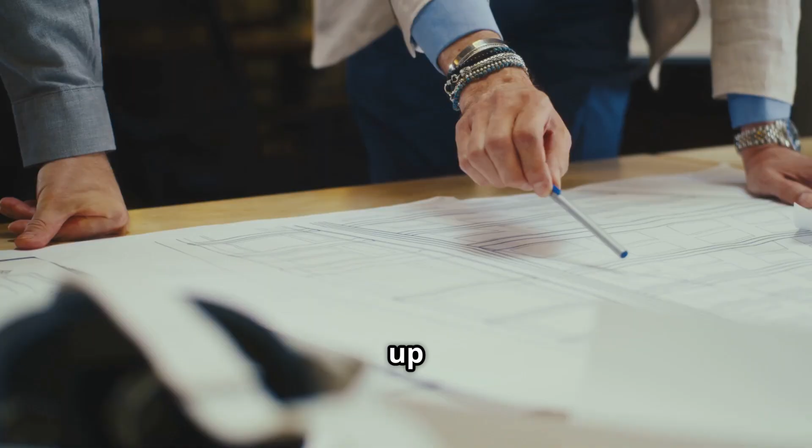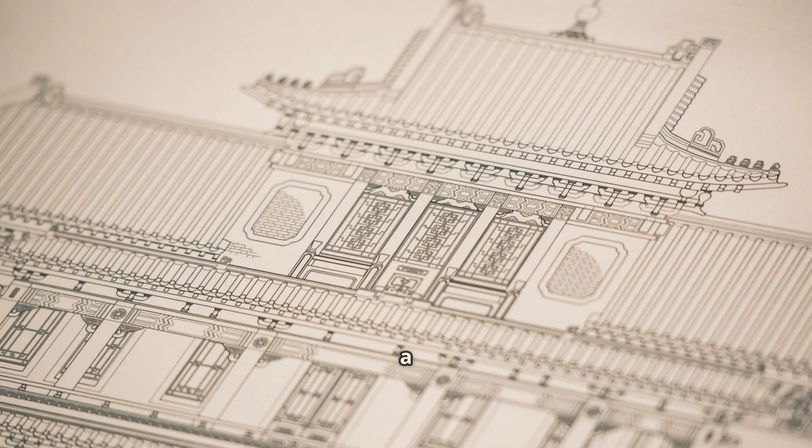The first sketch was drawn in May 1884 by Maurice Koechlin and Émile Nouguier. Their initial drawing was a raw, skeletal concept, a feat of pure mathematics and structural logic. It was their calculations that proved such a tower could stand against the forces of wind and its own immense weight. Eiffel initially called the design a giant pylon and showed no interest.

Koechlin and Nouguier then went to the company's head of architecture, Stephen Sauvestre. He looked at the design and realized that for this tower to be accepted, it needed more than just strength. It needed grace. On the original design, Sauvestre added the decorative arches at the base and the glass pavilion to make it look less like a bridge and more like a monument. He also designed the pavilions on the first level and the dome top.

Sauvestre transformed a stark engineering diagram into an architectural statement, giving the iron skeleton a sense of elegance and form that softened its industrial might. This is the hidden story of the tower's creation. Eiffel looked over the design again and decided to buy the patent rights from his own employees to become the sole owner of the design. His name was now attached to the project, and it would be his name etched into history.

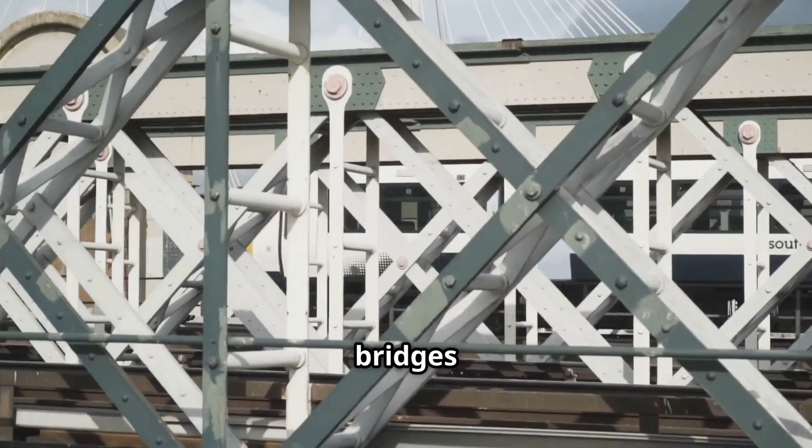Now the question is, who was Gustave Eiffel? He was a bold entrepreneur who took on the monumental risk and staked his reputation on its success. He was a brilliant engineer, a master of metallic structures known for building bridges that spanned impossible distances. But building the Eiffel Tower was no small feat. It is a story of collaboration, silent geniuses, forgotten builders who would later risk their lives to assemble it.

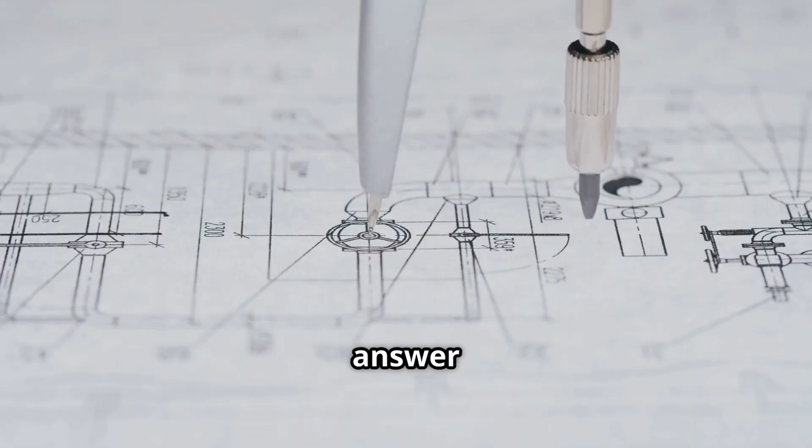So how did this team turn a hated blueprint into an icon? How did they overcome the technological limits of their time, the political battles, the relentless public scorn? To answer that, we must go back to the beginning. We must decode the engineering, uncover the controversies, and reveal the people who fought for a tower that nobody seemed to want, yet the world could not forget.

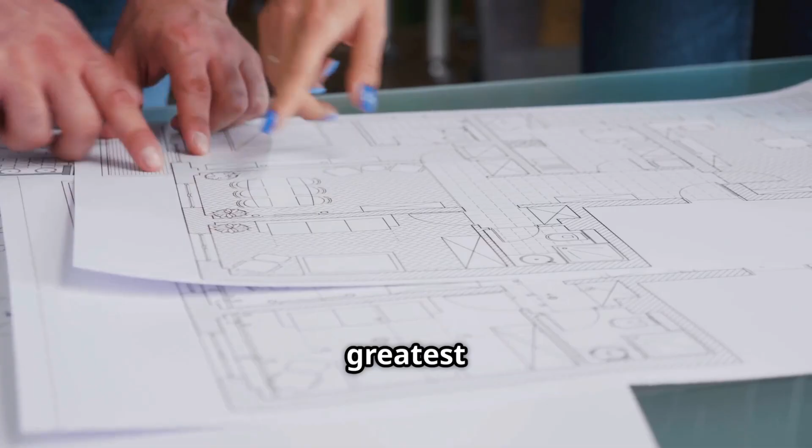The story of the tower begins not with a sketch but with a challenge. Paris was preparing to host the 1889 Exposition Universelle, a grand World's Fair marking the 100th anniversary of the Revolution. It was a moment to declare France's industrial and cultural might. The centerpiece had to be spectacular, something no one had seen. The government launched a competition, inviting the greatest engineers and architects to submit designs for a temporary monument on the Champ de Mars. One simple rule: it had to be tall.

A 300-meter tower. The idea was audacious, almost fantastical. During that time, the tallest structure was the Washington Monument, a stone obelisk just over 169 meters. This new tower would be nearly double that height. The competition ignited imaginations. Over 100 proposals arrived from all over the world. Some were bizarre: a giant water sprinkler to cool the city. Others were monumental: a massive stone tower that would have collapsed. Many were dismissed as fantasies.

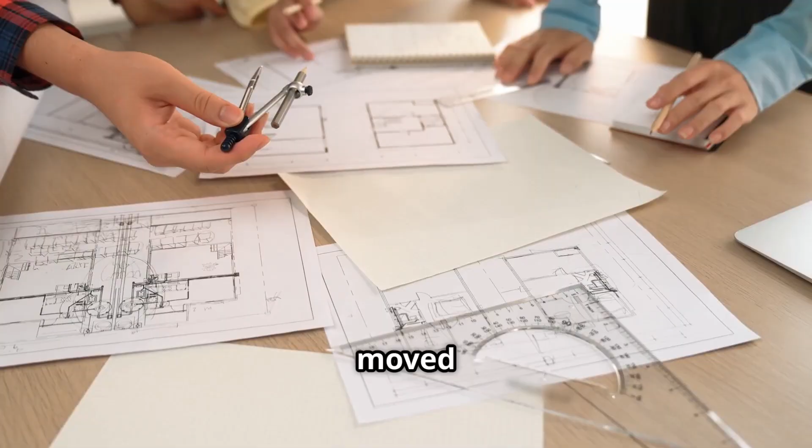But one design stood out, not made of stone, but of iron. The proposal came from Gustave Eiffel's firm. He was a celebrated engineer, a master bridge builder. While others were rooted in the past, he moved into the future. A lattice of iron, incredibly strong, surprisingly light. Born from bridge engineering logic, applied vertically at an unprecedented scale.

A machine for reaching the sky, it captured the jury's approval immediately. Thousands of pages of calculations, proving stability, detailing construction: not just an idea, a solution. In June 1886, the contract was awarded.

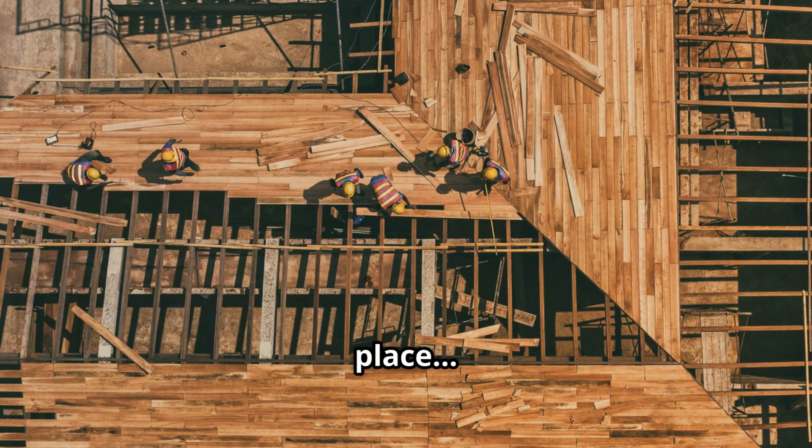Gustave Eiffel would build the 300-meter tower. Winning was only the first step. He had to convince a skeptical city, navigate political opposition, assemble a team to build it. The plan was in place. The battle for its creation was about to begin.

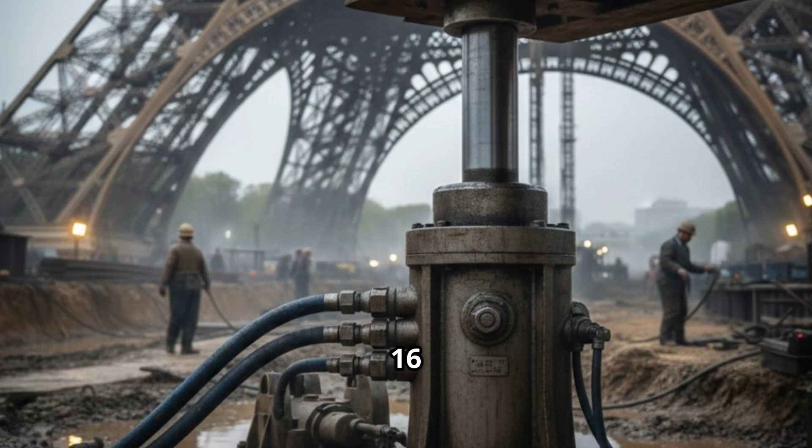The first problem was the soft soil. The Eiffel Tower sits on the banks of the River Seine. Two of the four legs, north and west, were only meters from the river. The ground was not solid earth but waterlogged silt. Eiffel didn't just dig. He used 16 watertight pneumatic caissons, massive iron boxes.

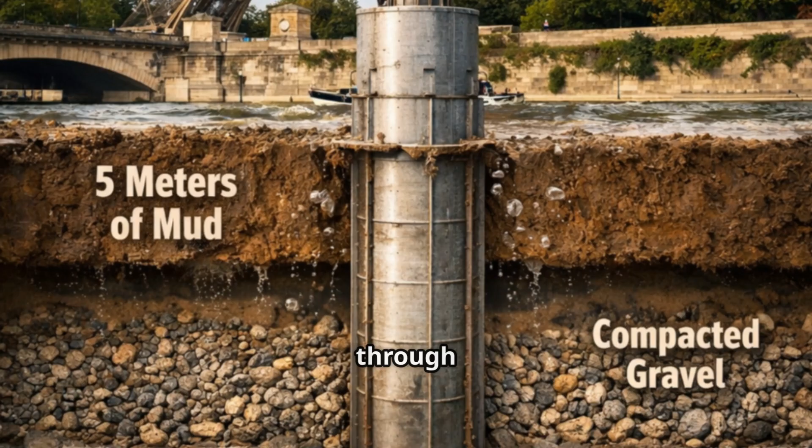Compressed air was pumped in to keep the water out, allowing men to dig by hand in a pressurized environment below the river level. The caissons were sunk through 5 meters of mud until they reached a layer of compacted gravel and bedrock. If these hadn't reached that specific geological layer, the tower would have leaned or collapsed into the River Seine within years.

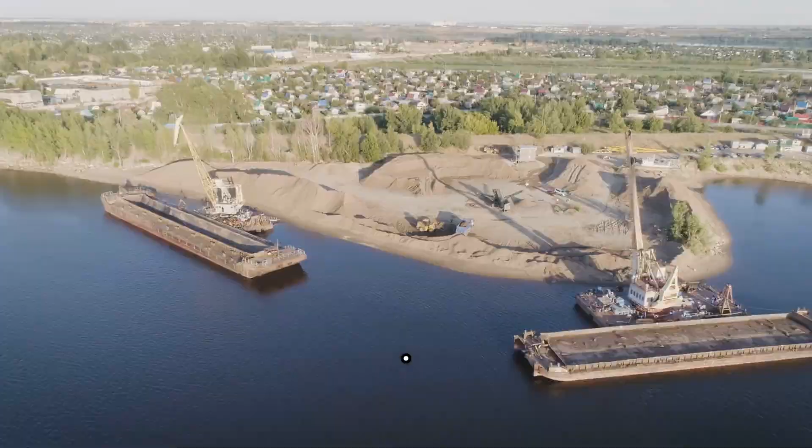Mathematically, if the four legs were off by even a few millimeters as they slanted inward, they would never meet at the first platform, 57 meters up. This was the same technique used for the Brooklyn Bridge.

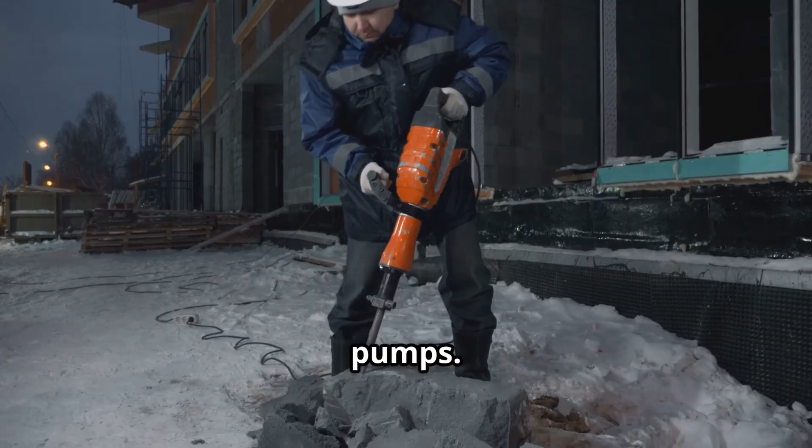Eiffel placed each leg on a hydraulic jack operated by hand pumps. This allowed him to lift or lower each of the 800-ton legs independently to ensure perfect alignment. Once the first platform was joined, the jacks were removed and replaced with permanent steel wedges.

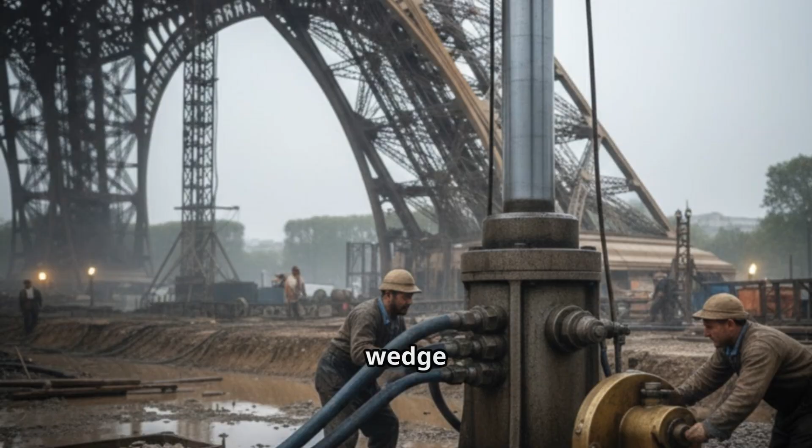Back in the 19th century, there were no complex mathematical formulas for wind loads at 300 meters. Eiffel totally relied on his bridge builder's intuition. The tower's unique curve is actually a physical graph of wind pressure. The curvature of the legs is designed so that the bending moment of the wind is perfectly balanced by the weight of the iron itself. It was an engineer's solution, stark and unadorned.

Because of this design, the tower is incredibly light. If all the iron were to be melted into a solid block to the size of the base, it would be only 6 centimeters tall. The air inside the tower weighs more than the iron framework. Gustave Eiffel knew that for a public monument, engineering was not enough. The tower had to have an emotional appeal, a sense of grandeur.

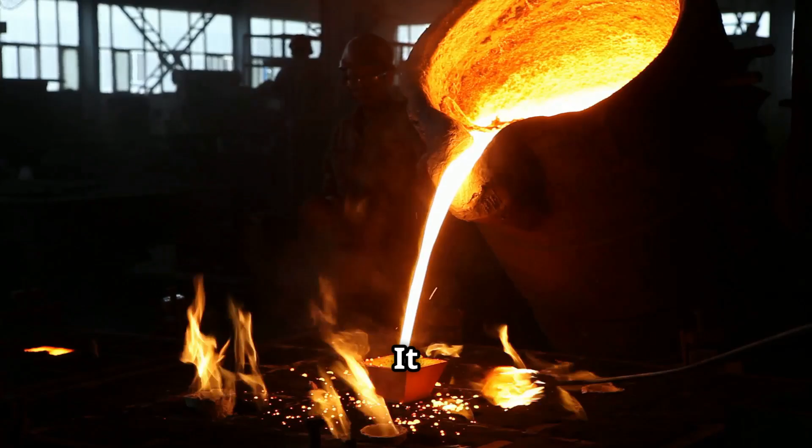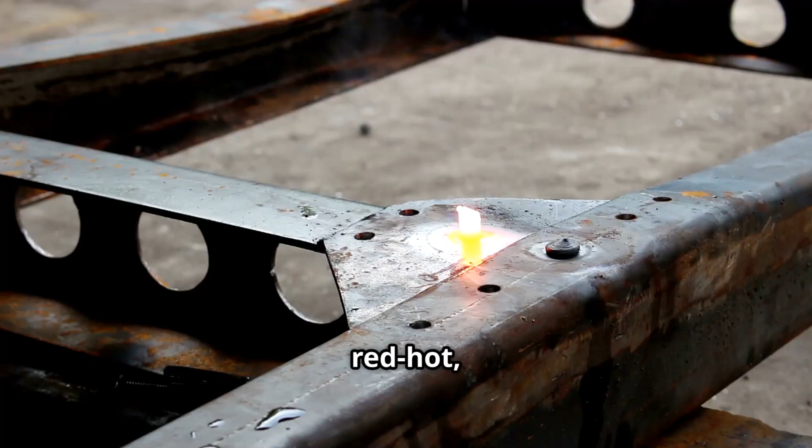Eiffel didn't use steel. He used puddled iron, wrought iron from the Lorraine region. It was more flexible and easier to rivet. The entire construction of the tower was an industrial orchestra. Each of the 2.5 million rivets required a specialized four-man team, one to heat it red hot, one to hold it, one to shape the head, and one to hammer it.

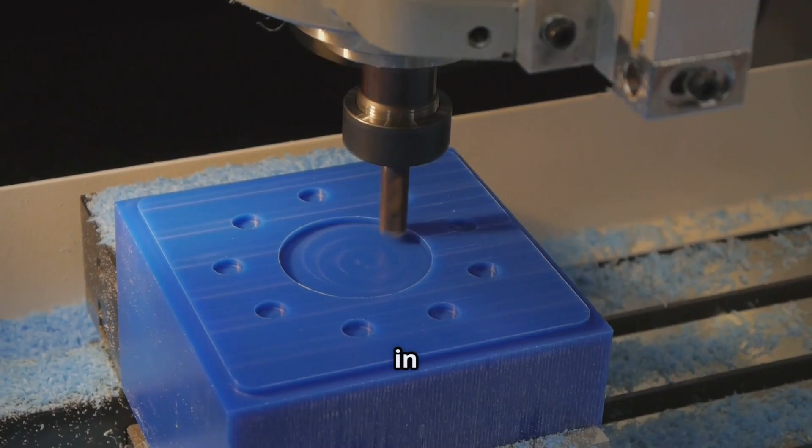The rivets were inserted hot. As they cooled, they contracted, pulling the iron parts together with a force no bolt could match. This is why the tower remains stable even as it expands and shrinks by up to 15 centimeters, 6 inches, in the summer heat. Every piece was pre-drilled to an accuracy of 0.1 millimeter in his factory in Levallois-Perret. Of the rivets, 2/3 were done in the factory. Only 1/3 were hammered in 300 meters in the air.

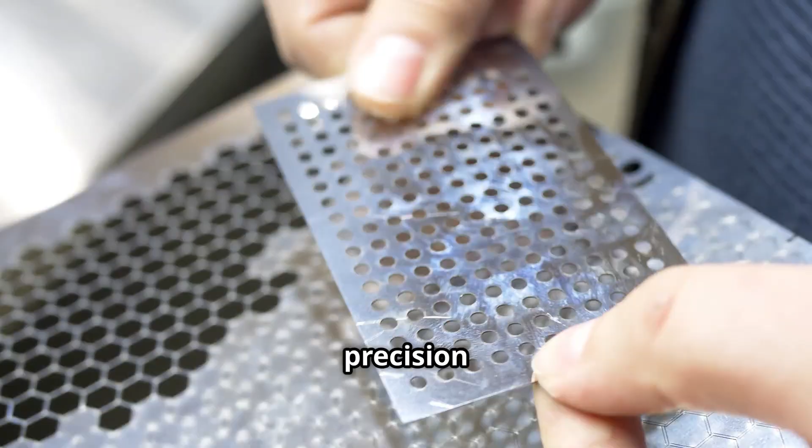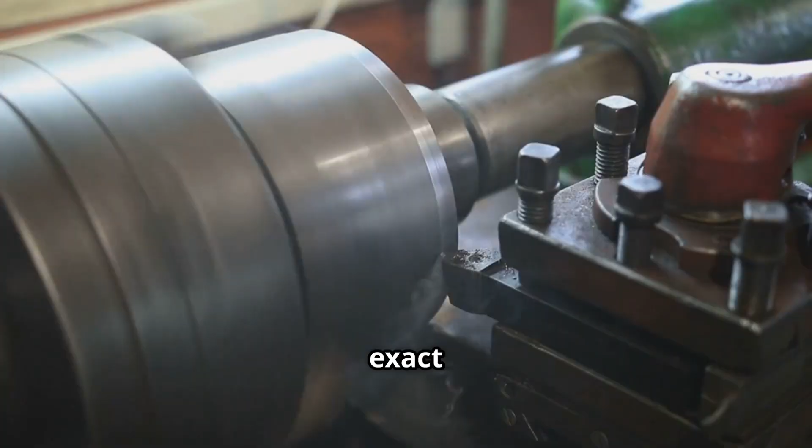Machine shops shaped members to exact dimensions. Planners mapped every bolt position meticulously, and drafters updated drawings periodically. As tolerances were checked, the foremen signed off before lifting each section. They calculated the stress on every single beam, the angle of every joint, the placement of every one of the 2.5 million rivets that would hold the tower together.

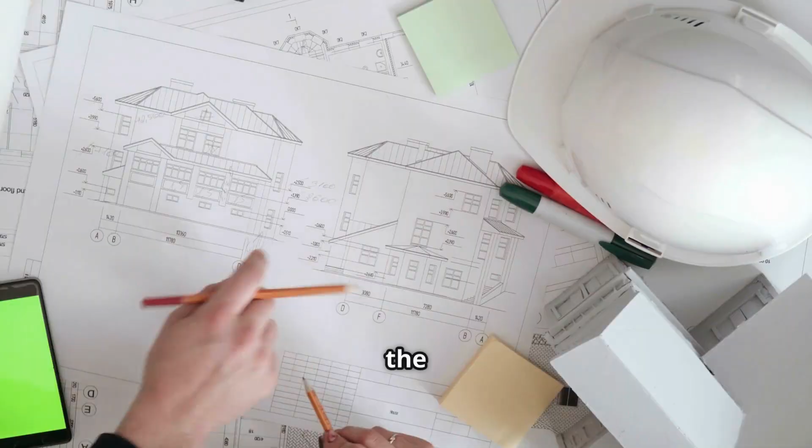They were the silent architects, translating the grand vision into a precise mathematical language. It was their painstaking work that ensured every piece would fit perfectly, and that the tower would stand tall and true against the forces of nature. Up close, the iron lattice reveals where millions of rivets locked this tower into a single breathing frame.

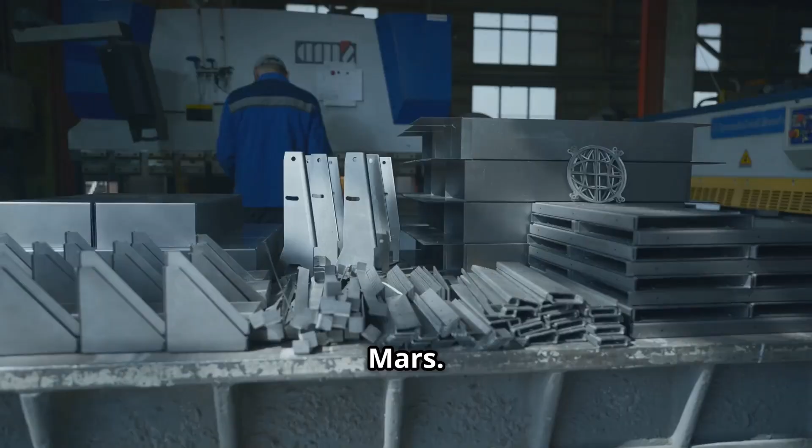Crews worked like a human tower, each role lifting the next in a disciplined, repeatable rhythm. Across the city, workshops cut, drilled, and labeled parts bound for assembly on the Champ de Mars. Iron bars were heated to a cherry glow, the precise softness needed to shape unforgiving puddled iron. Sparks fly as edges are prepared and plates fitted tight, ready for the riveters' closing blows.

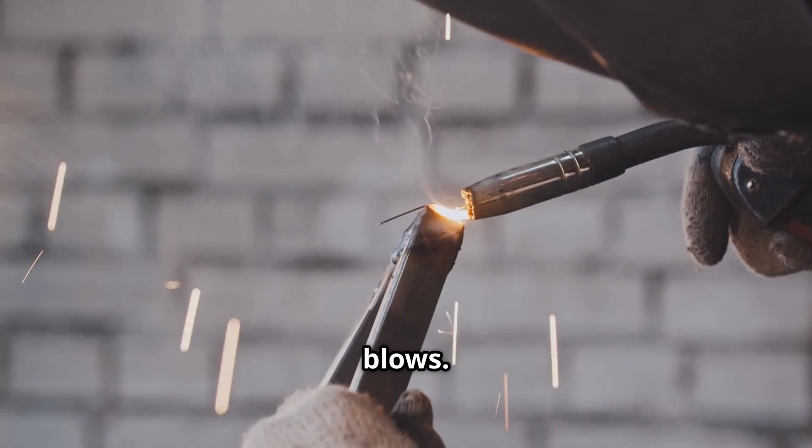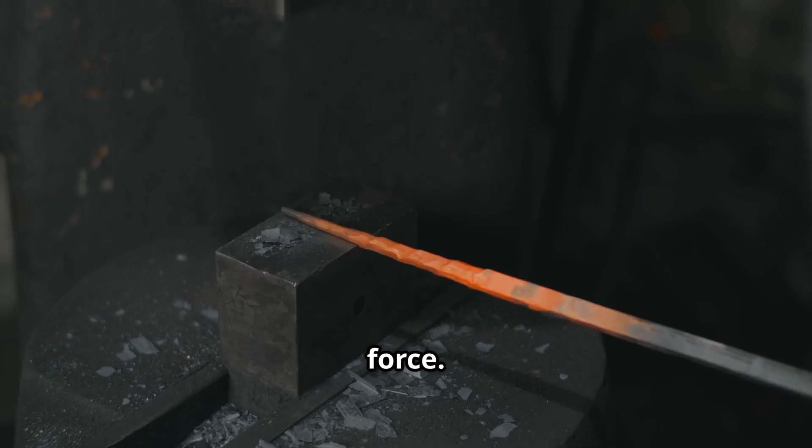A white-hot rivet is caught, set, and hammered into a perfect head before the metal cools. Hydraulic hammers drive stubborn pieces flush, ensuring tight joints and even paths for force. Paris watched as iron from distant foundries arrived by barge and rail to feed the rising frame. Piece by piece, the skyline shifted, the legs climbing steadily above the city streets. Industrial presses punched and pre-drilled holes to within 1/10 of a millimeter.

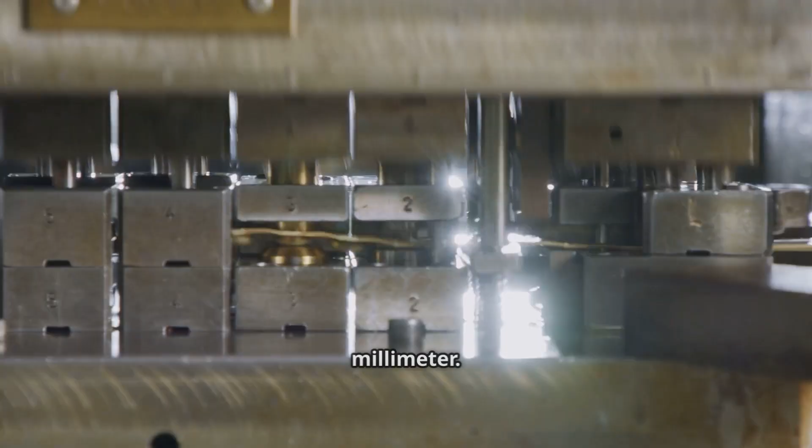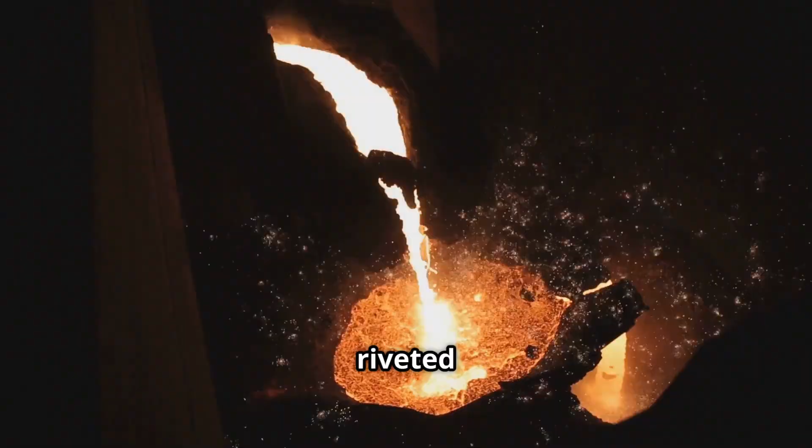In the foundry, molten iron became plates and angles, each stamped and catalogued for its exact place. Rivers of glowing metal were cast into members later drilled, matched and riveted high above Paris. Safety crews inspected scaffolds, hoists, and gear before each climb to keep the rhythm unbroken.

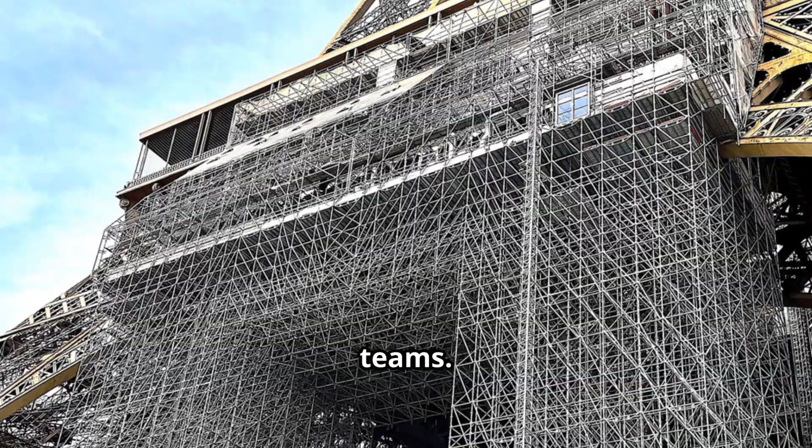Every gusset and diagonal brace channels wind through the lattice and down into the foundations. On site, crews aligned parts, pinned them in place, and readied seams for the rivet teams. Foremen tracked progress with gauges and lines, correcting any drift as the height increased.

Accidents were rare but real, and the work honored those who risked everything to build it. By spring, the iron giant surged higher, each hammer's echo rolling across Paris. As winter set in, crews broke ground for the first floor footings on the frigid Champ de Mars.

Snow and icy winds slowed deliveries, forcing shorter shifts and constant thawing of equipment. Ice formed on scaffolds and tools, making every step and surface a hazard. Work sites were blanketed in snow, and progress crawled between storms. Days slipped by on the calendar as weather delays piled up.

Still, crowds gathered to watch the iron skeleton inch upward through the cold. Newspapers tracked each milestone, praising ingenuity and questioning the schedule. Early service towers and stair platforms went up first to access the rising legs. Night work continued under lamps, as crews pushed to keep the timeline.

By early spring, the silhouette was unmistakable. Paris's new giant was finally taking shape. Inspectors walked the members, checking rivets and bracing after every lift. From base to sky, surveyors verified the alignment of each leg daily. Precision ruled the build. Tolerances were measured to the millimeter.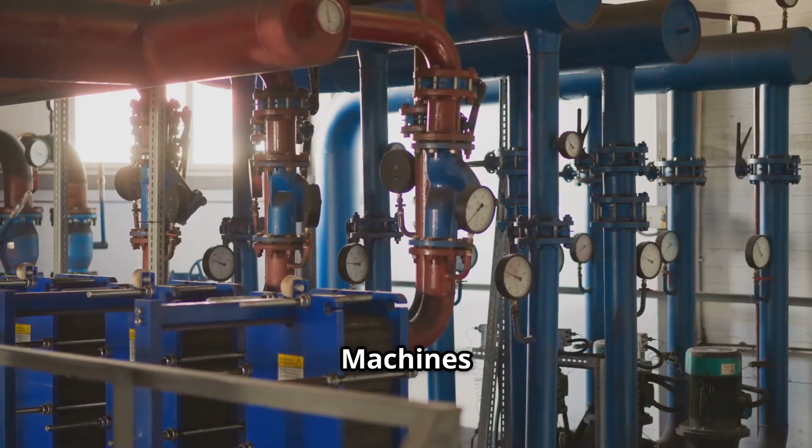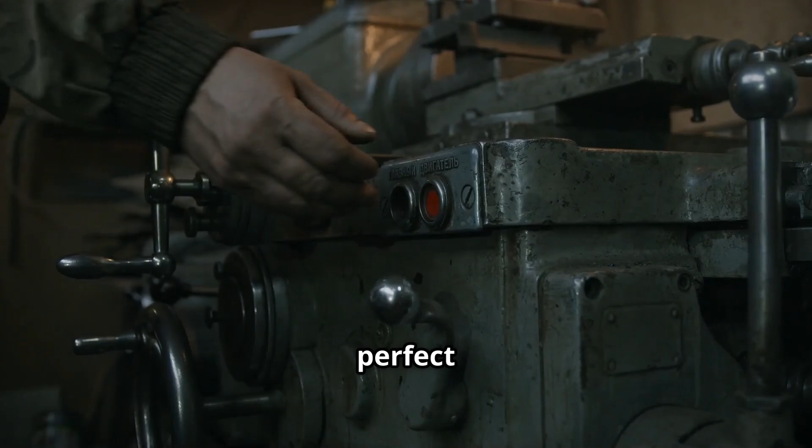Machines clanked and compressors hummed to power drills and hoists. Workers pumped the massive leveling jacks with foot pedals to nudge the legs into line. Fine adjustments on site brought prefabricated parts into perfect fit. The teams assembled nodes like clockwork, tightening sequences to avoid twist.

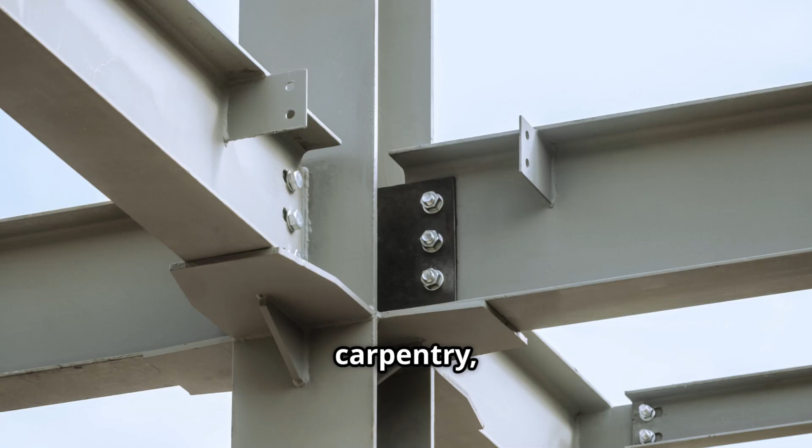Power from temporary grids and wind gust checks guided when the next lift could proceed. The joints were detailed like timber carpentry, transferring loads cleanly between members. And the towering cranes swung iron pieces into position with practiced rhythm. While looking up through the lattice, the logic of forces and flow was visible.

So when the first platform locked, the crew cheered. Their precision had paid off. Engineers posed proudly, noting deflection readings well within design. With cranes still busy, the project surged ahead toward the second level.

Spring brought unpredictable gusts that stalled the lifts. Engineers measured sway and recalculated tolerances daily. Crews tightened braces, then paused when wind spiked. Crane operators waited for safe windows between gusts. Every hoist depended totally on wind flags and barometers.

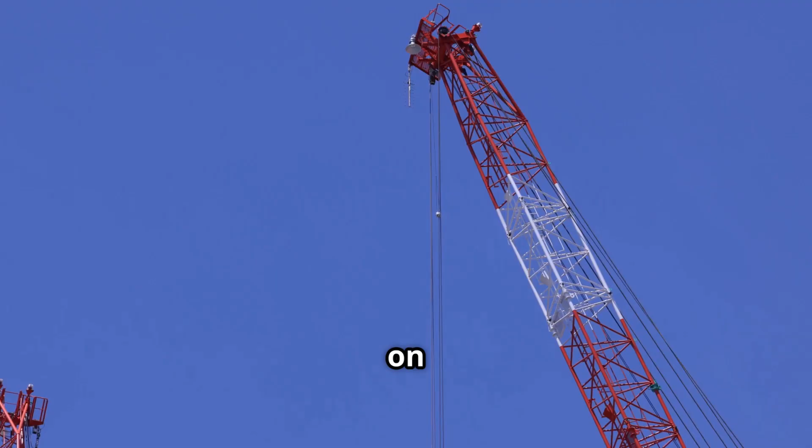And from above, Paris watched steel choreography in air. The plans detailed sequences that minimized time aloft. The lattice shape shed wind instead of fighting it, and the cloud shadows raced the growing outline across Paris. Riggers clipped lines, ready to lock members instantly.

The drafting tables updated angles after each wind reading. Trees bent below, as if warning crews to hold position. Mathematics clearly guided them when to climb and when to wait. The tests proved that the curve distributed pressure efficiently. Foremen coordinated lifts with whistles and hand signals.

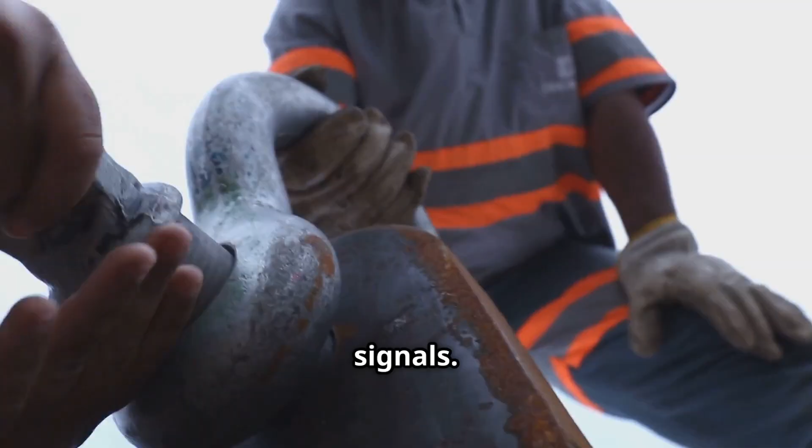The streets funneled equipment toward the Champ de Mars. The teams were rotating shifts, keeping focus sharp under strain. Clear days advanced meters. Storms, however, erased several schedules. Timekeeping was crucial as each delay recalculated the plan. Time-lapse hid the patience required between lifts. Despite tempests, the tower kept rising, line by line.

Guys, if you think the challenge was just about stacking iron, you haven't decoded the full picture yet. We are only halfway through this industrial gamble. We have seen how the foundations were won against the river, but the most dangerous part of the vertical climb, and the secret that saved this tower from the scrap heap, is still to come. Stay tuned for part 2 as we finish this decoding journey of the Eiffel Tower.